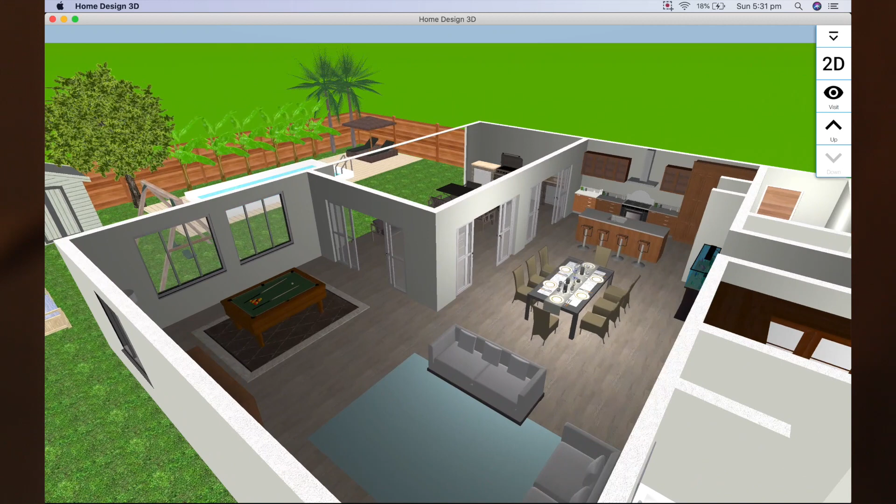So what we'll do first of all is we'll walk you through what the final design looked like, and then we'll walk you through how we got there, the process we went through and the ideas we had and why we had them to get the kitchen, meals, family, games room and outdoor area looking over the pool with the best layout possible.

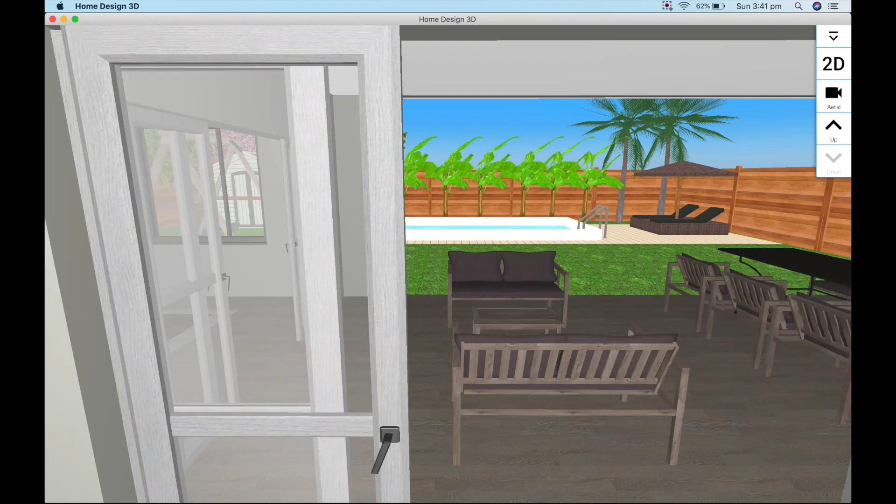Rooms that are required: we need a 4-bedroom, 2-bathroom home. It has to have plenty of storage area. It must have a study, which is meant to be located towards the front of the home for the client so they can work from home nice and easy. Their master bedroom location they want in the middle of the home. We also need a kitchen, meals, family, games room and outdoor area, which the clients have requested that we have all those rooms at the rear of the home overlooking the pool.

We draw up the block in its dimensions and we roughly work out where we're going to position rooms, and we generally do this in circles.

Okay, so first of all, this is our block of land. We're 17.2 meters at the front of the block and we're 42 meters deep. It's a rectangle, nice and simple, 90-degree angles on each. We have a 4-meter setback from the front boundary, which we need to take account of. We can't build in front of that line there. This is a council verge and then the road's down here further.

So with that in mind, we now have a bit of a perimeter. We've got a 1.5 meter setback on each boundary, so we can't go too close to the wall, except for maybe the garage can be on the boundary.

So let's look at our orientation. Now we're in Perth, Western Australia, which is in the southern hemisphere. So we really want to take into account our northern light, which is really important to us. So north on this particular block is just going to be up there. So the northeast sunlight coming through is really important.

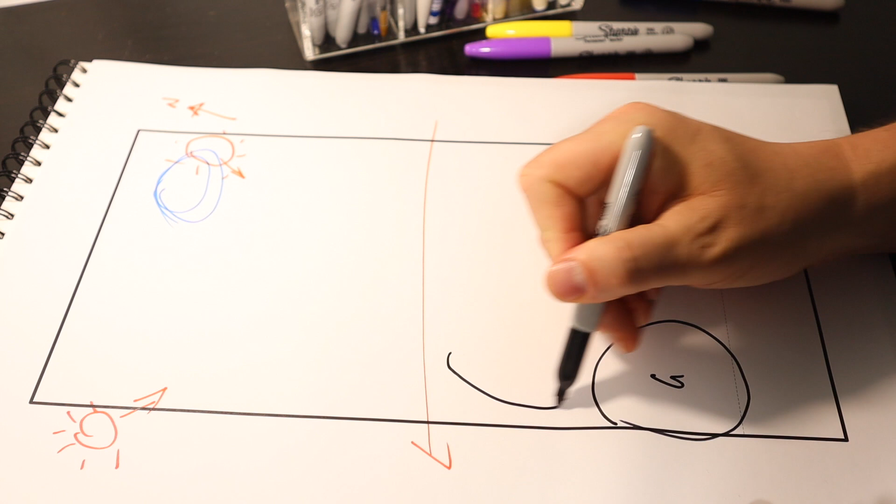The master bedroom, ensuite, and walk-in robe into this area here behind the garage, tucked away, because on this side of the home, we're going to have our minor bedrooms.

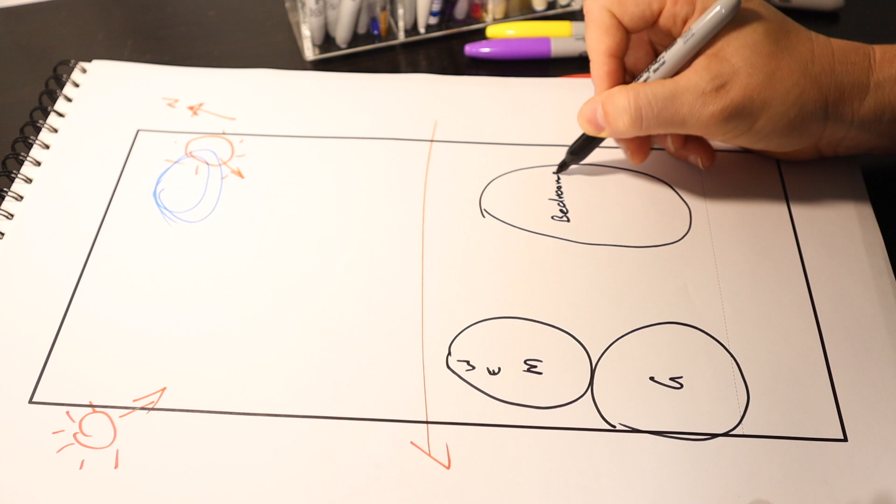We're probably going to put the study in somewhere around here. So study in here, and that might be our entryway through here. Okay, so that's our entry. What this means is that we need storage through here, laundries, all sorts of stuff, which will be part of the home that we're going to design.

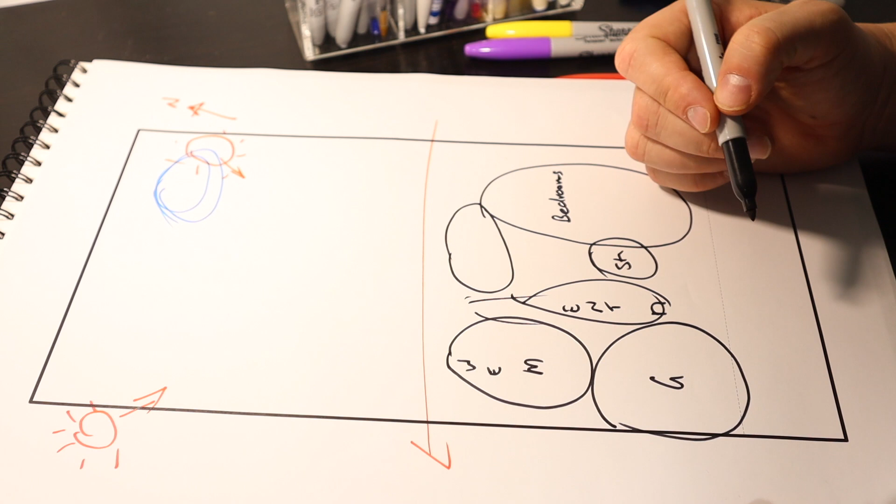So what's next? At the back, we need kitchen, meals, family, games room at the back, and we need to find a configuration that best works to take in this backyard. We need a kitchen, a meals area, a family room, a games room, and an outdoor area. All that has to fit into this area here, focusing on the backyard.

Okay, so yes, we could have put the pool in the middle. That could have worked. Probably the pool's not best up on this side. So this, we think, is the best place for the pool. We need to work out where we're going to configure those rooms.

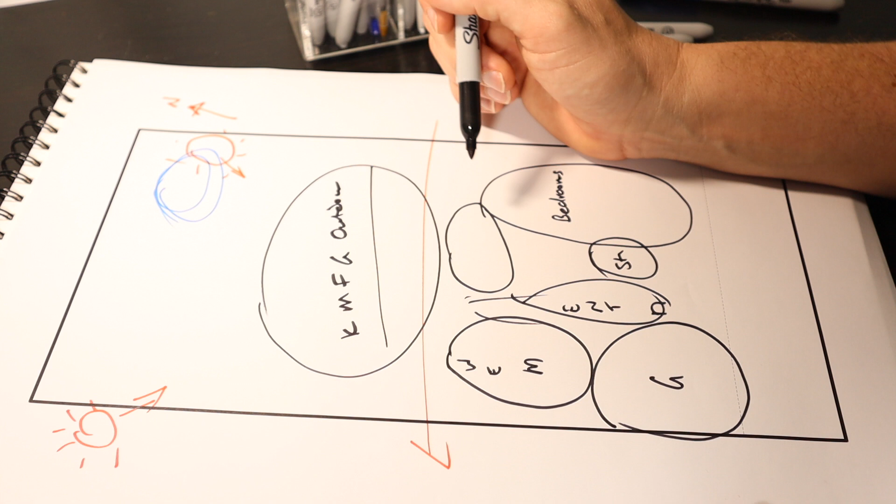So what we're going to do now is design this up, but we're going to design up everything except for the rear of the home. The reason we're not designing the rear of the home just yet is because we want to walk you through our thought process of where we're at so far. So let us design that up and we'll come back to you.

Okay, now that we've designed up the home, we've got minor bedrooms placed where they are. We've got lots of storage in there. We've got the master bedroom with a nice walk-in robe, nice ensuite layout, which works really well for the clients. It's away from the minor bedrooms, so they've got a bit of privacy there.

The study's at the front, nice and easy. If guests come over and the clients want to come over to the home, the study's right there, nice and convenient in the entryway. It's also a bit of a feature in the entryway.

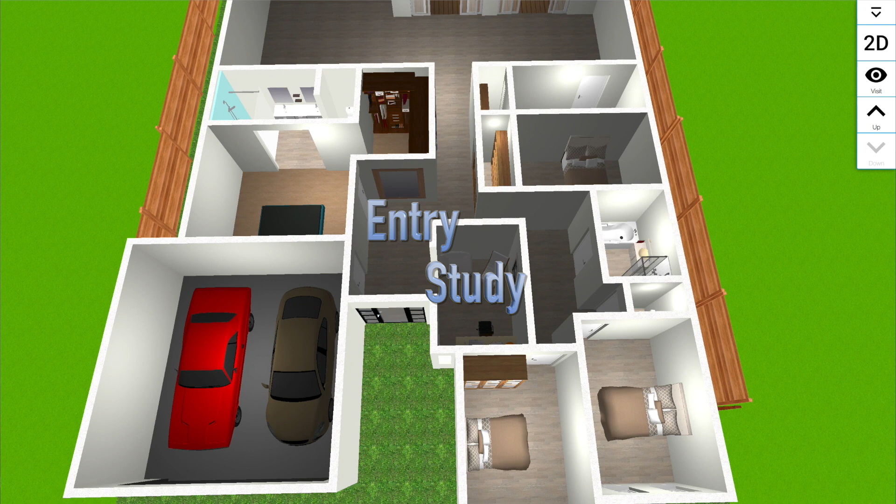The kitchen, meals, family, and games room, also the outdoor area, needs to focus on the swimming pool. And that's a major part of this, so we can't forget that. We need to maximize what rooms are going to take advantage of that view of the swimming pool in the best location.

Now, option one that we can do, we could put the kitchen in this location, which means that the meals, which is generally next to the kitchen area, would go into this location in the middle here, which works well. So that's fine, it's a tick there.

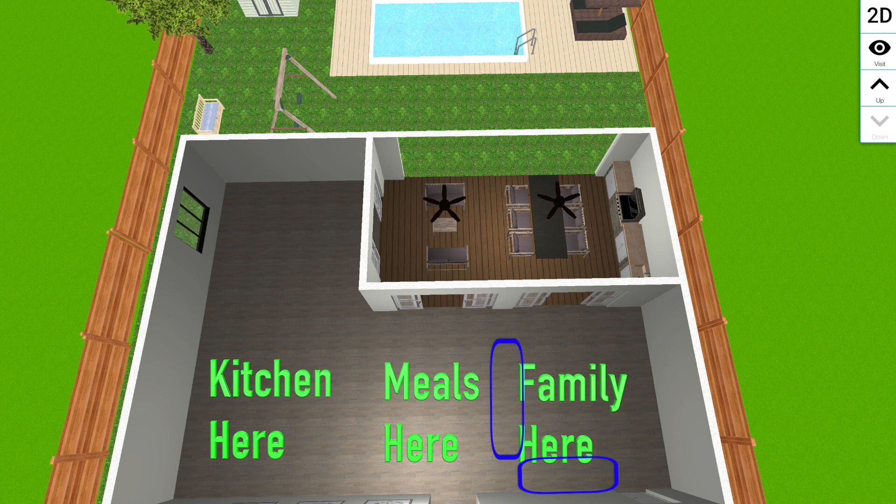And the family room, put the couch here and the couch here, it focuses out onto the pool, which works quite well. So that works. Putting the games room in this location works as well because that can easily flow onto the outdoor area. The room that doesn't work is really the kitchen.

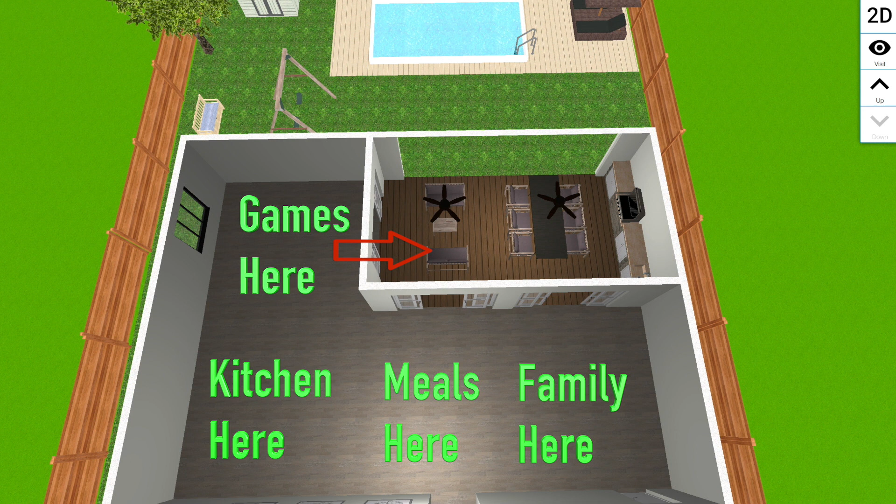The kitchen placed here, you don't really get a good view of the pool, and if you've got the kids swimming in the swimming pool, you definitely want to have a view from the kitchen. Having a games room next to a kitchen doesn't really make a lot of sense, so I'd say the kitchen's wrong. This positioning doesn't really work.

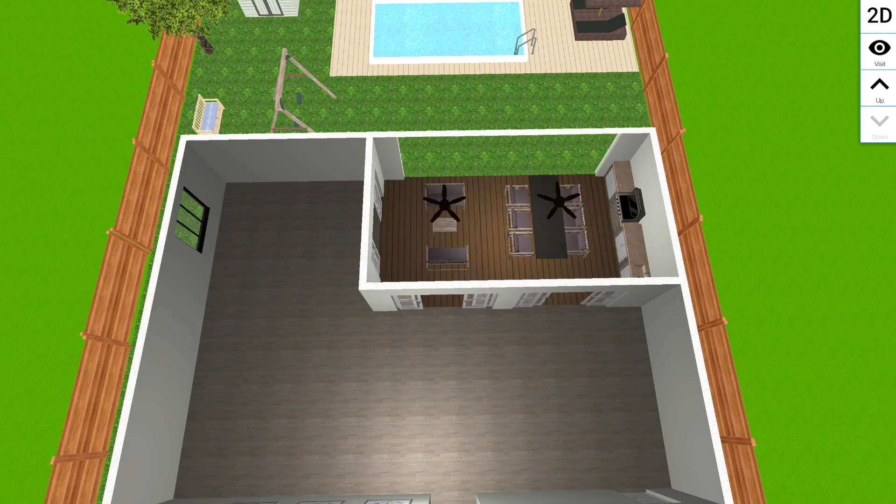This next position is putting the kitchen in this area here, which works really well. You can actually lead straight onto the alfresco area. You do have a window behind you that could actually have a view to the pool, which works well. So the kitchen has a view.

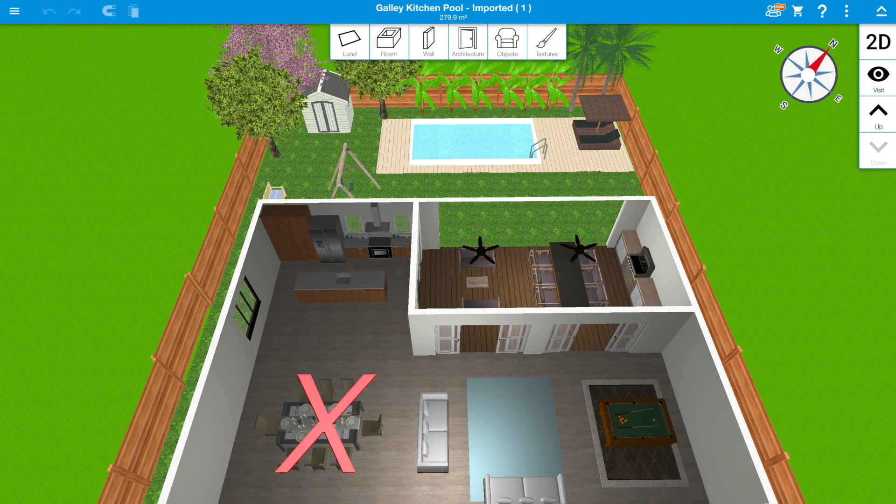But then next to the kitchen, you would have the meals area because that generally makes sense. Having the meals area in this location means it doesn't really flow into the alfresco area, which is generally something you'd want to do. You generally want an indoor-outdoor feel between the meals area and outdoor area, and having that here doesn't really work. So it's not really the best. And then also you've got to locate the family room and games room.

The family room won't work in the middle there because you'd obviously be walking through it. You have to put couches, and it sort of blocks the whole area. The games room in this far end would work if that's what you want to do.

The other thing to think about is the kitchen location, since this is a long way from the garage. So if you park your car and bring your shopping in, you've got that much further to walk to drop your shopping off in the kitchen. It's just one more thing to think about.

Another option, though not really a great one, is putting the kitchen in the middle here. It doesn't really work, because you'd obviously enter the home and walk straight into the kitchen. It's not ideal, and it would also mean the meals and family area would be either side of you, which doesn't really flow. So it's not a great location to consider.

Now the last location, which we actually feel is the best, is having the kitchen here. This means we have a direct flow straight from the kitchen to the outdoor area, so you can cook indoors and it flows outside. If you're having a barbecue area, you've got that nice flow happening. The meals area here makes a lot of sense too, because from there you can also flow out to the outdoor area. You've got a view from the kitchen of the TV, it's a direct flow through there. Makes a lot of sense.

Having the games room next to the outdoor area as well as the family area is a really nice flow. The games room can link to the family area if you're watching TV, but it also flows to the outside area. So kitchen, meals, and games room all flow to the outside area, while the family room the least, but it's probably the room you least need it to. This makes a lot more sense to us as the best layout and location for each of these rooms.

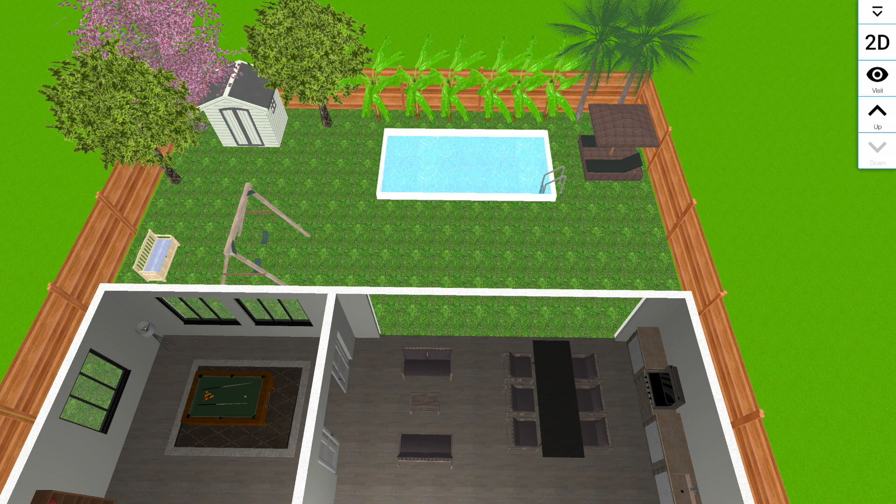Now, another thing to think about is swimming pool location. A mistake I've seen people make is having the pool closer to the outdoor area and leaving the free space behind it. That doesn't really work, because you have to work around the pool, especially with pool fencing, and it restricts your access to the backyard.

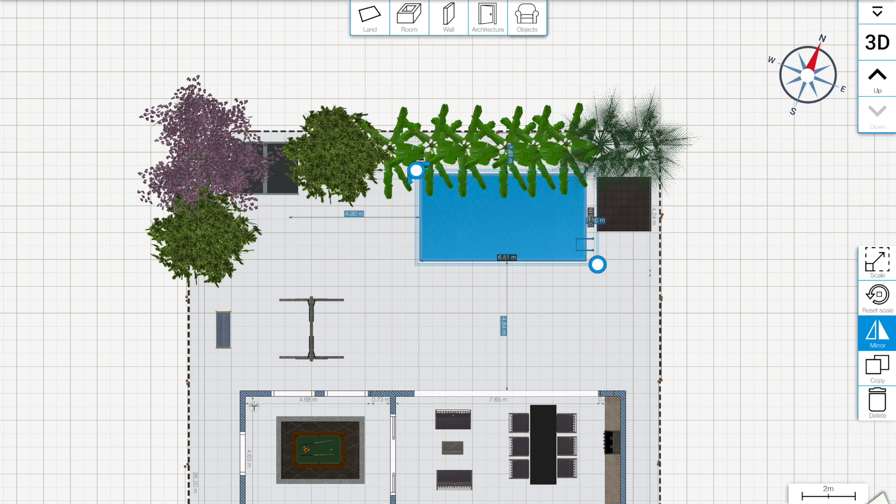The best way to do pool location is to have it as far away as you can in the backyard, provided you don't have a huge backyard, but have it as far towards the back fence as possible, allowing the grass or free area between the pool and the home. That works best for this scenario.

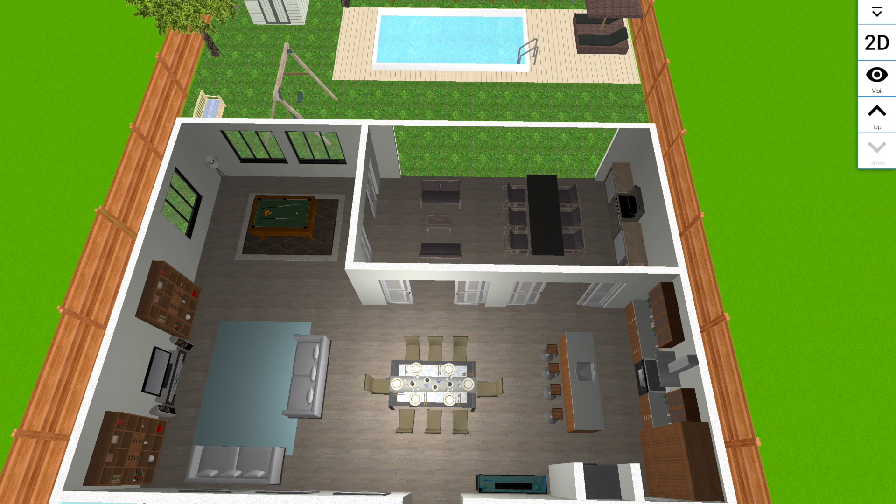You really do want to consider having a view of the pool from the kitchen, as probably the main room. The reason is when you're spending time in the kitchen prepping food or whatever it might be, and the kids are playing in the pool, you can have a direct view just by looking up, without having to look past walls. That makes life a lot easier, and those are probably the main design principles for having a swimming pool in the backyard.

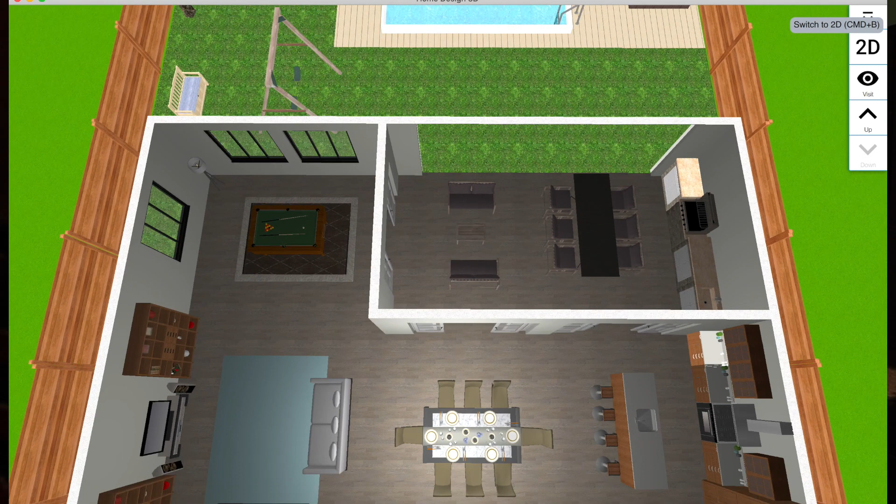So there you have it. What we have now is a 4-bedroom, 2-bathroom home with a study, kitchen, meals, family and games room, with an outdoor area overlooking the pool. We feel this is a really good layout for this sort of home.

We feel we're maximising the view of the pool from the kitchen, meals, and family area looking out the back, and living in this home will be a happy home that works well for entertaining or just spending time with family. That about wraps up what we're covering today, on why we position the kitchen, meals, family, games room and outdoor or alfresco area overlooking the pool to maximize that view.